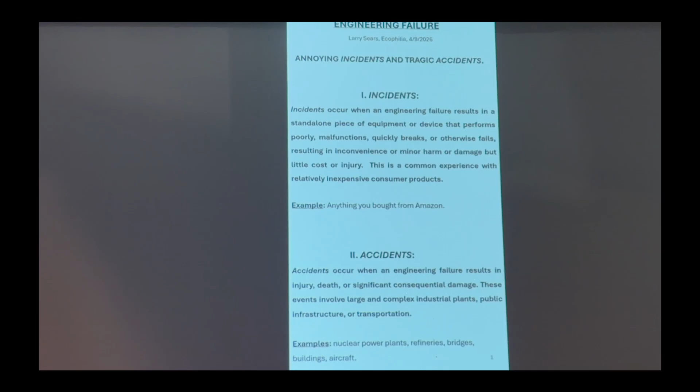Thank you for that introduction, Harvey—it was probably in error itself. So, is this working? Testing... this is the one you're using. Oh, okay, for the PA. Oh, I thought this was the one. No, that's—yeah, going, all that's right. See, communication errors, that's how things go. But I have to get closer to this, so let's move it a little bit that way. Larry, this is a wireless mic, you can just grab it. Different keyboards—I've never done a PowerPoint this way, so we'll see how it goes. I hope you've all read that, that's the introduction so I don't have to repeat it. Can't hear it? No? This one? This is—yeah, how's that? Okay, all right. It's insensitive, yeah, it's not—okay.

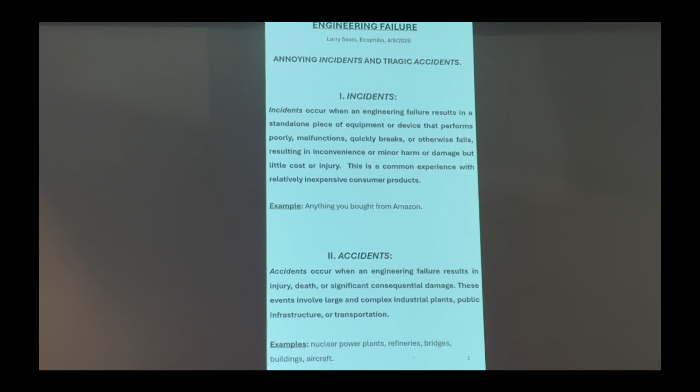People have studied and thought about failure in engineering, not forever, but it started probably in World War II when everybody was in a hurry to bring technology to war. Sounds pretty current. They had to then feed back and figure out what went wrong. After that, people in the 50s looked at operations research, analyzing and cataloging failures. Then sociologists and others, philosophers, anybody involved with neurology and what's going on in people, and whistleblowers and all that started thinking about it.

So it's a very, very interesting topic. If you've become addicted to the YouTube videos on tragedies and airline crashes and stuff, you'll understand why—it's a very, very complicated topic. I won't even talk about medical errors, because that's a whole other area that brings to mind all kinds of concerns and tragic incidents that we've probably all heard about.

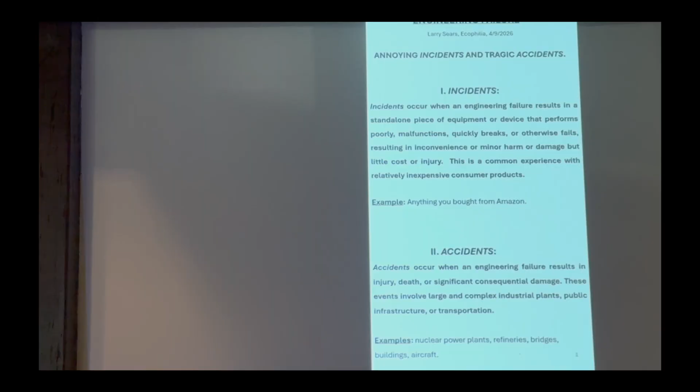I'm going to be talking about incidents and accidents. That's how a couple commentators have referred to engineering. Incidents are things that don't really bother anybody - you buy something and it's a piece of junk, or it breaks. It's common and annoying, but not terrible. We call those incidents because they don't have consequential problems or people don't get hurt typically. Accidents are more serious - things like airplanes crashing or bridges falling down, and other frightening things you can think about. I'll spend more time talking about those, and I hope some of these examples and topics will bring up questions as we go along.

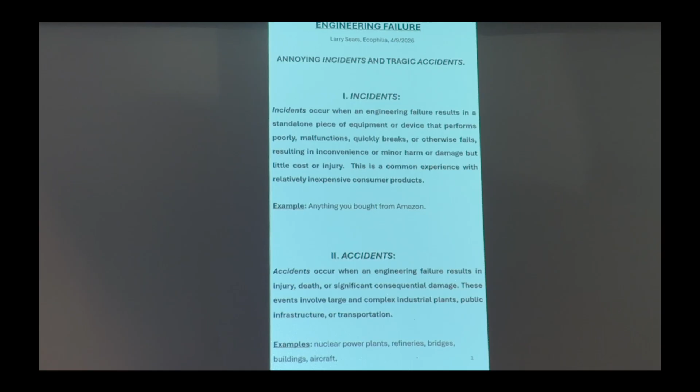So, incidents. We always come back to the root causes - how did these things happen? And of course, that is the challenge.

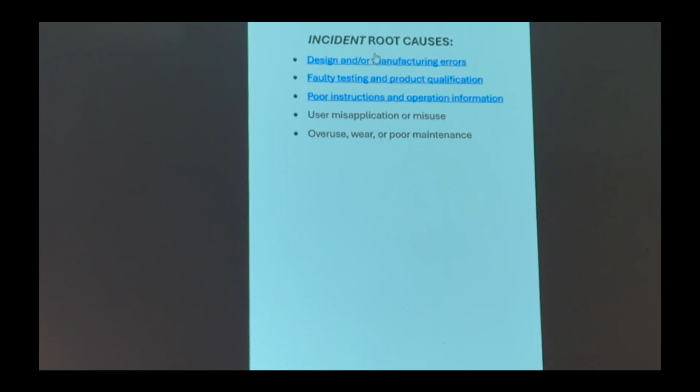I'm gonna have to lean down on this. Let's see if this works. Oh, it worked. Okay, so, incidental failures. I'm gonna hold this. There we go. All right, I should know wireless.

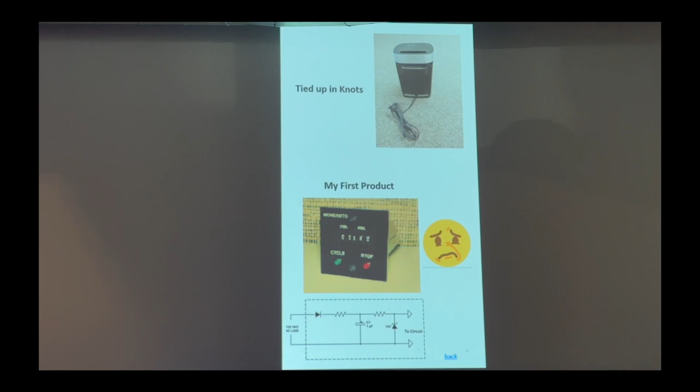This was one of my favorites - I didn't make this thing. It was a radio or some gadget that came with a line cord all hanked up, with a plug at the end. They built the device, attached the line cord, and then shipped it, not realizing you could never untangle the line cord, because you had to pass the device through the hank. So the line cord was permanently there, and nobody could use the product. That was a catastrophe, but it just goes to show you these problems can sneak up on you.

When we made things, we would always take it to the end - you'd actually put it in the box, ship it back and forth to your neighbor 10 times, and make sure it survived. If they had done that with this device, they would have realized they had shipped something that was dead on arrival.

The first thing I made when I was in a storefront on Murray Hill, trying to get into the electronics business, was a little gadget for Monsanto. I don't think it's around anymore, and I don't remember what it was for, but it was some kind of electronic control - a timer. I probably made 100 of them, which was very exciting, and it looked nice. And then they all started going bad immediately.

Interestingly enough, the ones in Alaska worked, but the ones in Florida never did - they failed immediately. So does anybody figure out what the problem was? Well, humidity, salt water, salt spray - something like that - but that's only near the coast. No, it was lightning. If you want to test something for lightning, send it to Florida.

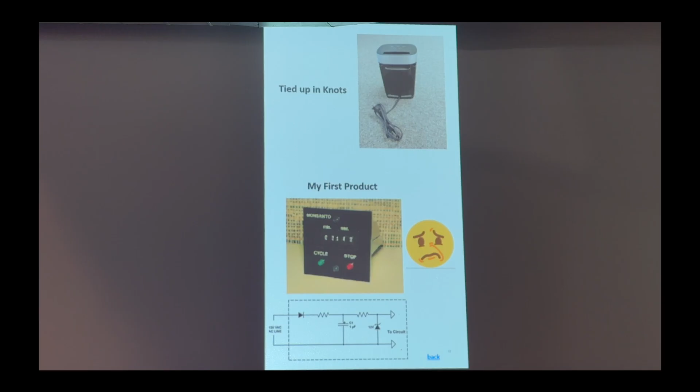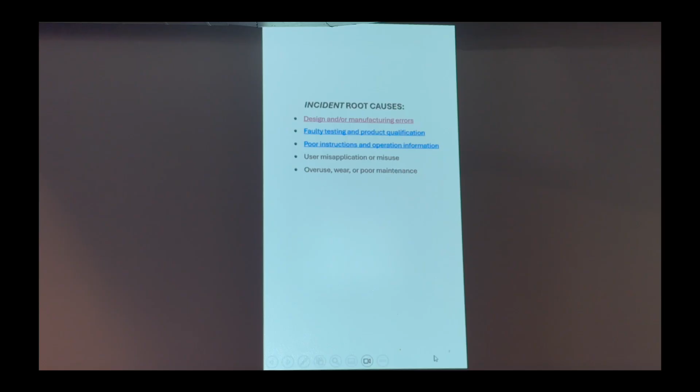But I moved on from there, fortunately. Whoops, sorry, I gotta do my trick here. I learned this is a very good aspect of PowerPoint, to link things. All right, so that was design and manufacturing.

Then we come to what else can go wrong - product testing. I was called into this more like a consultant. Eaton Corporation at the time was making HVAC equipment, and one of the things they made was a humidifier for a house - a box that sprays water into your heating vent down in the basement, and it humidifies the air.

And they were manufacturing this thing, and I got called into this factory, and these things were on the assembly line ready to go, and they had shipped some, and they didn't work, and they didn't know why. It was driving them crazy. So I looked into it, and it turns out they had done something very professional and very common. They had copied a circuit out of that manual you see down there at the bottom, and they thought it would work because it was a General Electric manual and they know what they're doing.

The problem is that it worked in the lab, but the humidistat, which was like a thermostat for humidity mounted on the wall of your house, was 50 or 100 feet away from that box in the basement, and the resistance of the wire was enough to make it malfunction. So they said, well, we're going to sue General Electric. And I said, good luck with that. These manuals are made for hobbyists and things like that. But that was interesting. They probably learned a lot more than I did, but things happen, and even the largest companies can make mistakes.

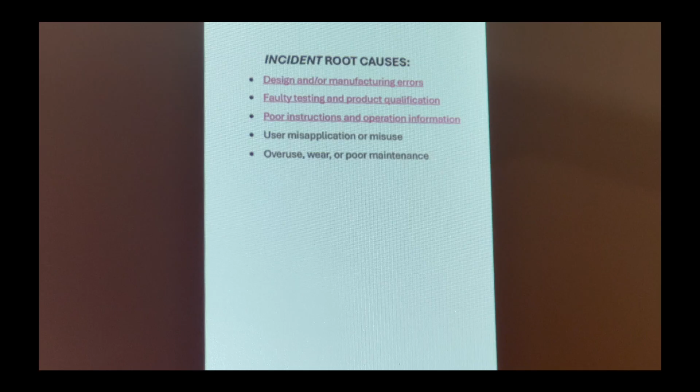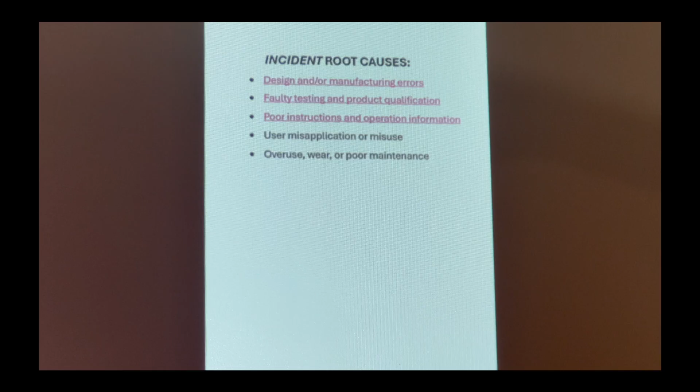So this is an example of an incident, and it's frustrating and aggravating. And I wonder, didn't anybody try it before they made it? So anyway, all right. Now we get into accidents. This is the serious, tragic stuff.

So we go back and look at the things that can go wrong, and let's go to design, the fundamental genesis. Pardon? The mic is also directional. Okay. Whoop. Like that? Ah, very good. Okay, thank you.

So we're talking about the system or project design, something big, like a bridge. It involves all kinds of engineering. It's very, very complicated, and certainly things can go wrong, and they can be little things or big things. So, a couple of satellites here.

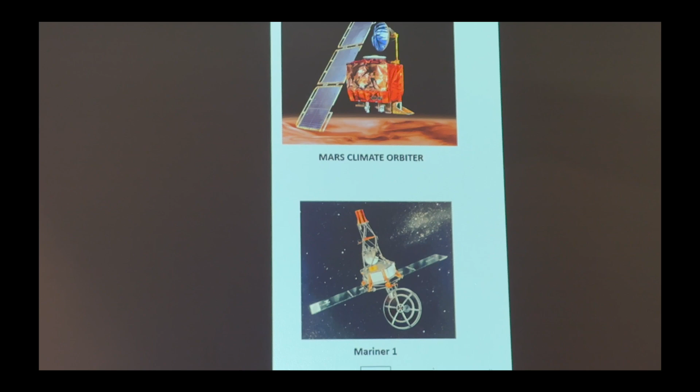Got to get this straight. The Mars Climate Orbiter was famous. That happened fairly recently, where there were two contractors, one working in metric and one working in English. You can imagine what happened. The numbers got messed up in transcribing them and moving the drawings over, and a $500 million satellite crashed because some intern didn't realize what was going on.

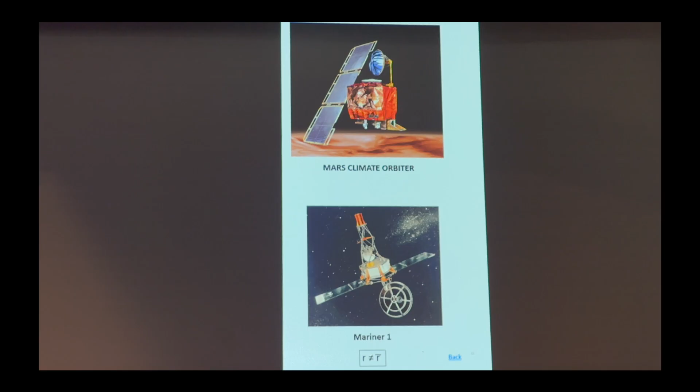The Mariner 1 was a long time ago, and this thing was landing, and it had a parachute to help, but of course in the Martian atmosphere it didn't help much, so they had retro rockets supporting it as it landed, and it had legs that had to open up, because of course they have to close everything up to fit in the nose cone. So it comes down, the legs open up, and the satellite decided it was already on the surface. So it turned off the rockets, and the thing crashed.

What happened was they had some kind of sensor, and I never figured out what kind it was, but maybe it was just a switch on one of the legs, or maybe some kind of velocity sensor. But the opening of the legs was enough of a shock that it fooled the sensor into thinking it was on the ground, and that was the end of it, because it turned off the rockets and the thing crashed.

So that's where testing comes in. Maybe you can't calculate something like that because you don't know exactly what the atmosphere is, and there could be variation in the speed coming down. But my goodness, you should be able to test it and look for that type of event. So that was pretty classic. And of course, when you think about it...

On television, probably years ago, you see news story after news story of rockets blowing up. It took them a while to get it right. Now, this latest one, I forget what it's called, the one with the astronauts, they just tested it a couple of times. I wouldn't get in that thing, so.

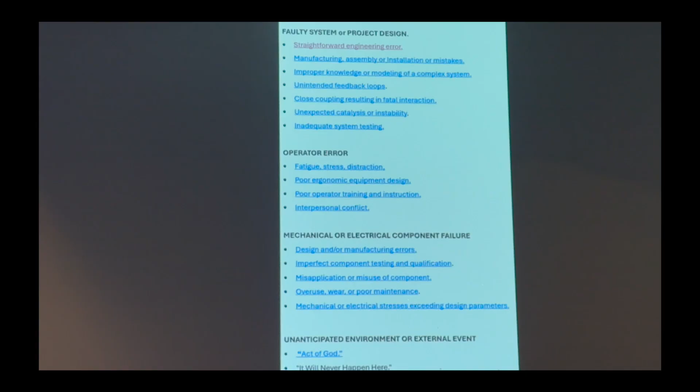But it seems like they always have leaks. I mean, your house doesn't leak all the time, yet these incredible rockets are always leaking. I just never understood that.

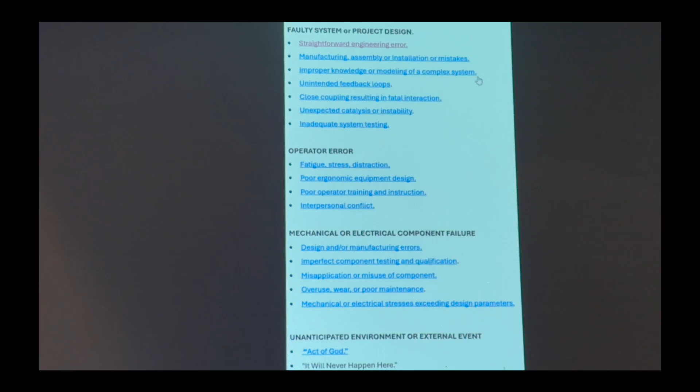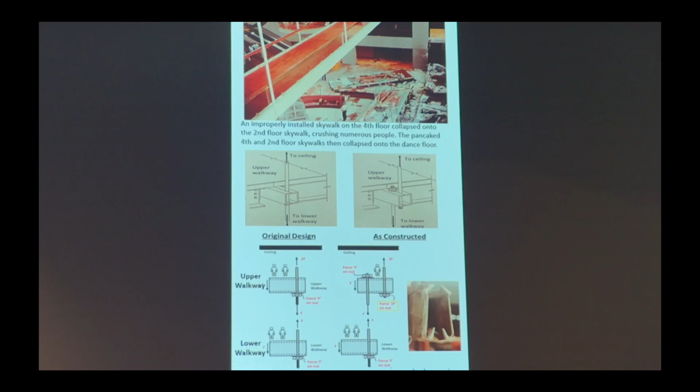Originally, this was an example of sort of consecutive errors. Originally, they had one steel bar, here's one steel bar, supporting both walkways. And the bar went through the upper box beam, and the box beam is going the width of the walkway. And then there was a nut and a washer here, which supported this box beam, but the metal rod continued to support the second box beam and the second walkway.

Well, if you stare at this, you can realize there's no way to put this nut on this rod because it's not threaded. You can't slide the nut all the way up and then put the other box beam on it. You couldn't assemble it.

And they realized that, so they came up with this very clever idea. The one rod would come down, and it would have a washer and a nut here. And the second rod would come down, and it would have its own nut and washer here.

And that solved the problem, except that in this configuration, the force on this nut is the weight of one walkway, and the force on this nut, trying to pull it off, is the weight of the second walkway. In this configuration, the force on this nut is one walkway, but the force on this nut is two walkways.

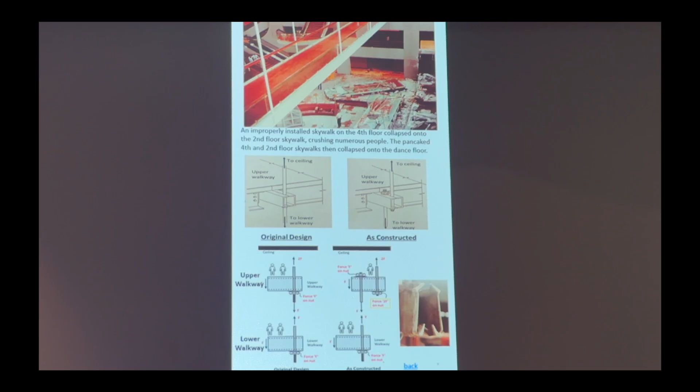Now, first of all, you say to yourself, a safety factor of 2 is not very tough. I mean, a safety factor of 3 would probably be used for a lot of situations like this, but obviously they didn't, and a force of 2 times was too much.

But when you think about it, that's really risky because you could have twice as many people on the walkway as you thought, or they could have had a big dinner and weighed a lot more. So I don't know, a safety factor of 2 is scary.

And there was another problem related to the size of the washer. All right, so if you look how the beam fell apart, you see how the bolt and nut pulled through. Somewhere I heard that the washer was too small too.

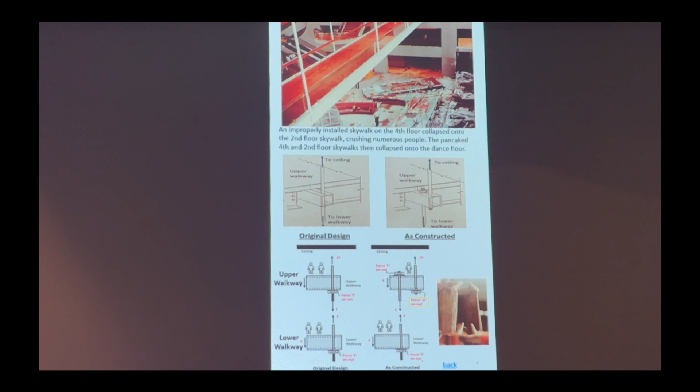Again, you've got all these problems, and it's easy to look at them and figure out what went wrong now, but not when you're under financial constraints and somebody's yelling at you and all that. Let me go back here.

Improper knowledge or modeling. Modeling is really important because you can't always guess what your environment's going to be. A good example is a concrete dam. You realize, of course, that a concrete dam is an arch lying on its side. And if you press on the top of an arch, the legs of the arch try to expand, but something is preventing that from happening.

A good example is a cathedral, where you have flying buttresses on either side, and the purpose of the flying buttresses is to prevent the legs of the arch from opening out.

The same thing is happening here, except the arch is lying flat. If you look at the top picture, those walls are preventing the arch from flattening, and the load, the water, is on the other side. So it'll work. Concrete loves to be in compression as long as the walls are there. The walls maybe aren't going to be there because you have earthquakes, but they have geologists crawling around drilling holes and stuff like that. Many times they just don't know what the bedrock underneath the wall is like. So the ability to model something to predict what's going on can be a real challenge. And of course you have to model, in this case, the walls, but if you're building a refinery, you have to model your refinery too and what's going to happen there. So that's a big part.

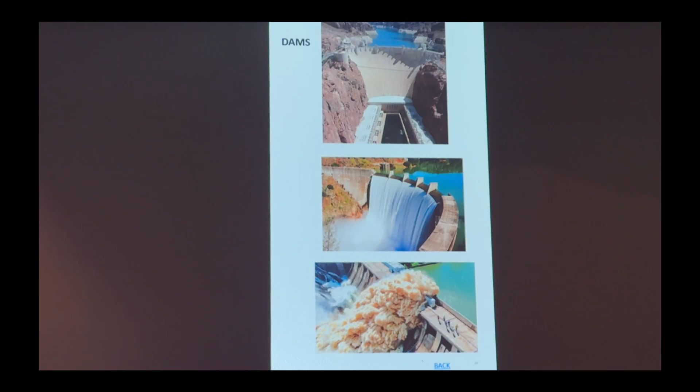And then, this is the incident - we got to go back to the accident. Unintended feedback loops.

I'll mention another one of my experiences. This is the Bingham building, which is on the campus here. There was this thing years ago, before you had big computers and finite element analysis - if you wanted to understand stresses, pulling on something, is it going to break, that is a very clever, although rather intricate or involved method of modeling these things.

You would take a piece of flat plastic, a quarter inch thick acrylic, and it had this interesting characteristic that if you stressed it and looked at it through the right arrangement of polarized light, you'd see beautiful little fringes. And the spacing of the fringes indicates the stress.

So if the fringes are close together, like over here we have a beam supported on two sides with pressure in the middle, you can see the pressure is highest in the middle. That's pretty easy to figure out, but if it's a complicated shape with holes or something, this is a very handy analysis. For example, here's two teeth of a gear rubbing, and you can see the stresses are very high at the point of contact. And this is a cantilever.

The way this worked is you had a light source and your acrylic model, and then a camera or some gadget looking at the polarized light coming out. The one requirement, though, is that in order to match index of refraction, you had to put this acrylic model in basically a fish tank, an aquarium of a special liquid that matched the index of refraction.

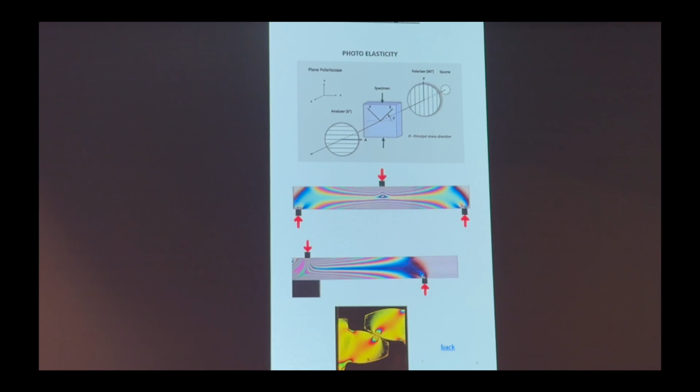It exploded. It was an exothermic reaction between this mystery oil and the copper angle irons that were part of the aquarium. Now, who would figure that out - it sat there for a month, and then maybe it was August, the temperature got a little higher, kicked off the exothermic reaction, and it went so fast it just destroyed everything in that room. I opened the door, everything was smoking and covered with black soot, which is the oil, and I just went home. He got his degree, but I imagine they just threw everything out in that room. It was disgusting.

So that was the idea behind a feedback loop that you don't realize is there - typically something that regenerates and causes more problems.

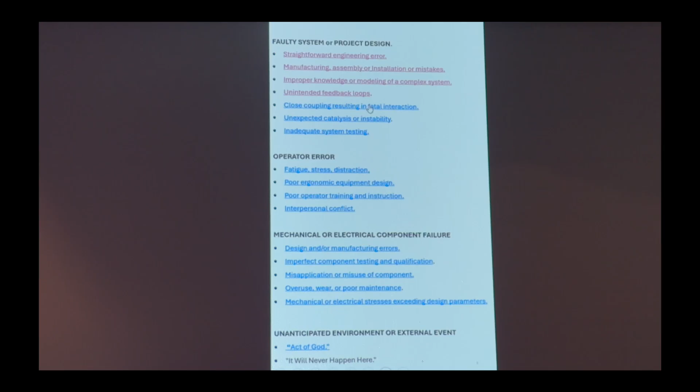Close coupling - these books that I mentioned are big on close coupling. The idea is that if you have a process where things are closely related, they can be too closely related. A very simple example would be say you have a fire alarm - a fire starts and the fire or explosion turns off the power supply to the alarm, so there is no alarm. That's an example of something that is closely coupled without redundancy.

Or maybe you have a temperature sensor or something, and the thing that is powering the temperature sensor breaks, and then you can no longer measure the temperature because, again, those two things are related.

So you want to have redundancy and all kinds of things. The godfather of close coupling and lack of redundancy is Three Mile Island.

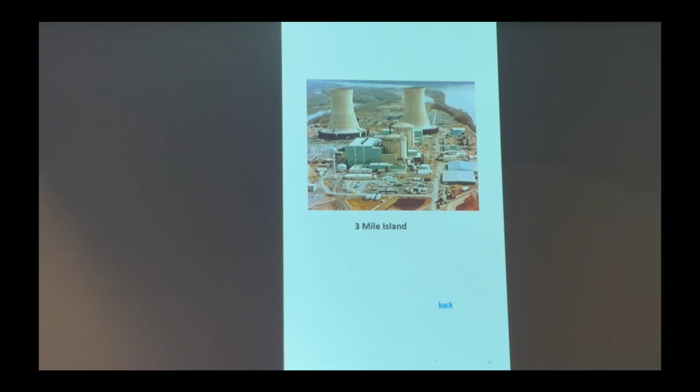Three Mile Island was obviously an incredible experience, let's put it that way, and it really changed the way power plants were operated. The way it worked, these are all sequential events with no break. We call that now a circuit breaker, something that breaks the idea of these events happening one after another.

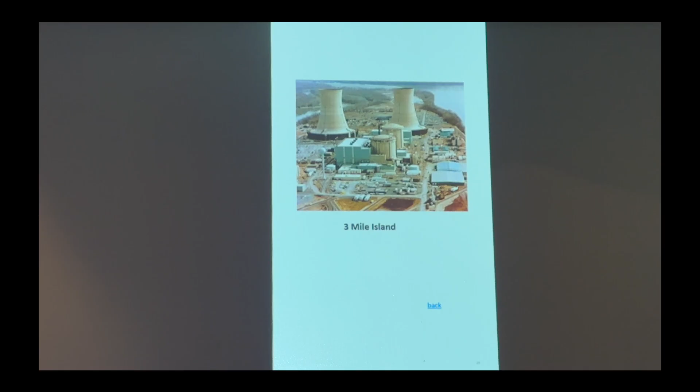But what happened was there was a failure in the non-nuclear part, just basically the steam turbine that uses what amounted to water that had been—you have dirty water in the reactor. Then there's a heat exchanger, which transfers the heat to clean water, and the clean water goes out into the world and runs the turbine and stuff.

But the turbine broke down, something happened, or there was a leak, so they had to turn that off. Well, when that happens, you have this reactor sitting there churning, putting out a tremendous amount of energy, but no place for it to go, so automatically it shut down, and it should, because it has no place for the energy to go.

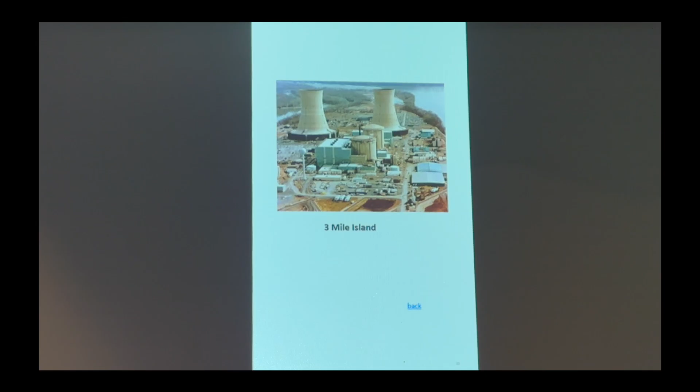So if you do that, though, you have residually a stored heat in the reactor, and things start heating up and boiling again. So what do you do? Well, you have to vent it. You have to vent the pressure in this reactor.

And so the release valve opened, that's good, but it's stuck open and it can never be closed again. So all the steam and water that was cooling the reactor started going out this pipe. And obviously then the big problem is you're no longer cooling the reactor.

Then everything escalated here because they couldn't measure the temperature in the reactor. Why? Well, they measured the water temperature, but there wasn't any more water.

That actually happened to me on a car once. I was driving along, and strange things were happening, and what happened was the temperature gauge said everything was fine, but there wasn't any water in the car. So I don't know how they do it now, but that was a problem. And that was in Kentucky someplace.

But anyway, in this particular case, several things happened. One was that the range of the temperature device wasn't enough, it got so hot the needles in the readout devices were pinned. They couldn't go any higher. They didn't know what was going on.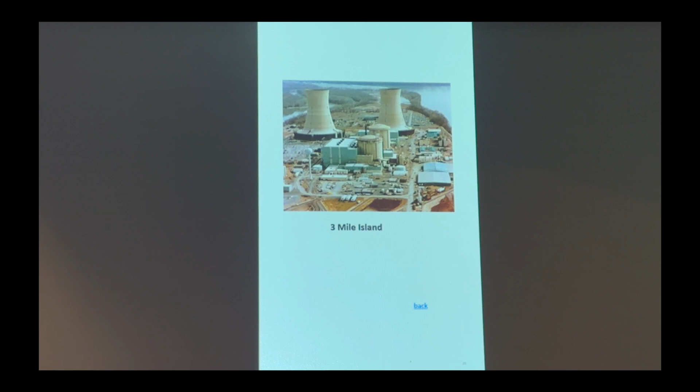And then in one case, somebody had a handwritten label for some other purpose. Basically, it was a tag that said this will be fixed on Thursday or something. And that tag was covering the one thing they had to look at. So it was just—and I'll talk about this later on—but it was absolutely terrible.

But they did have these pumps, of course, but then the pumps broke. The pumps had bubbles in the coolant pumps, and they had to be shut down. And then they just had to let this thing vent, and then of course there was no water to cool the core because they had vented it all out, and that's why the core was exposed and melted down.

So that's what happened to Three Mile Island, and you can read—there are obviously books written about it—and it's just horrible. They learned a lot from that.

Unexpected catalysis or instability. Okay—oops, sorry, we'll get back to that. So in other words, a lot of things are tricky.

Well, even like that exothermic reaction I mentioned, that happens a lot in refineries and power plants that are always in Texas or Louisiana and are always blowing up. Things just get out of control. I mean, so many things are linked.

I'll talk about some of those, but Three Mile Island had something that may or may not have happened, and nobody ever expected it, and now they're not even sure if it happened. And that's the infamous hydrogen bubble. Over here they talk about it, the famous hydrogen bubble.

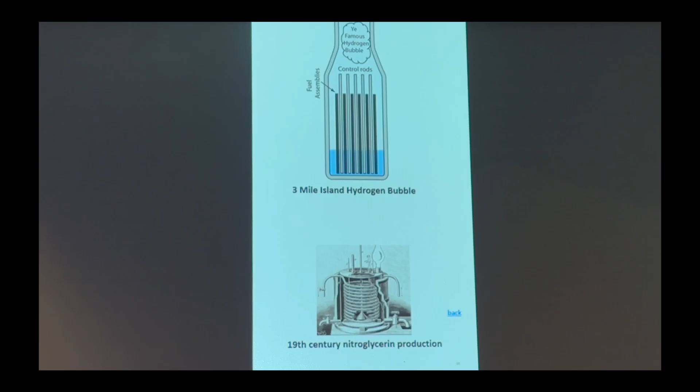Testing, all right. So this is the Mars Polar Lander, let's see what happened to this one. Oh no, sorry, that was the one that failed prematurely. I got them mixed up. This was the one where the sensors in the legs inadvertently thought the device had landed and turned off the motors.

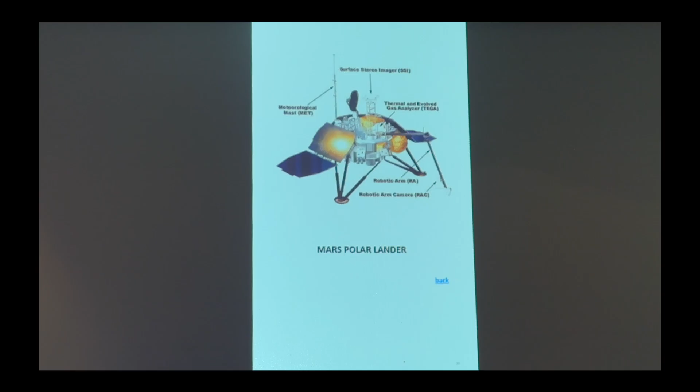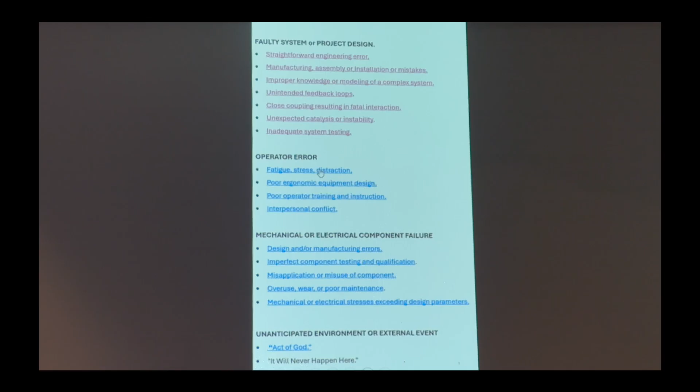Operator error. If you look at a particular environment, like airplanes or chemical plants, supposedly about 50% of the really bad problems are operator error. I don't know, it depends so much on the environment, and it depends who's telling the story too. But anyway, it certainly is a big problem.

This is a wonderful YouTube if you can find it—terrible, but wonderful. This was back in the 70s, and these two pilots—there were two back then, I think two pilots and a navigator, maybe a third or fourth, I don't remember—they're flying along and put the landing gear down. There are three levers: one for the left gear, one for the right gear, and one for the nose landing gear.

Each one has a pilot light. The pilot lights on the left and right indicated the landing gear was down, but the pilot light on the nose didn't. Of course that's a big problem. They tried to have traffic control look at it visually by flying by, but he couldn't tell if it was locked. So they didn't know what was going on—was the light bulb bad, the switch bad, or was the landing gear really bad?

They sent a guy down into what's called the hellhole, under the deck beneath the cockpit—I have a picture of it. It's like 20 below zero, and he's crawling around trying to peek at the landing gear. He couldn't tell, and came back up. Then they tried to disassemble the control panel because it might have been a bad light bulb, and the plane crashed. What happened was they bumped the autopilot and turned it off inadvertently. The autopilot would have kept them above terrain, but it didn't, and the plane crashed. It was a terrible story—these people were actually arguing about this stupid light bulb and forgot all about the plane. That's a great example of distraction.

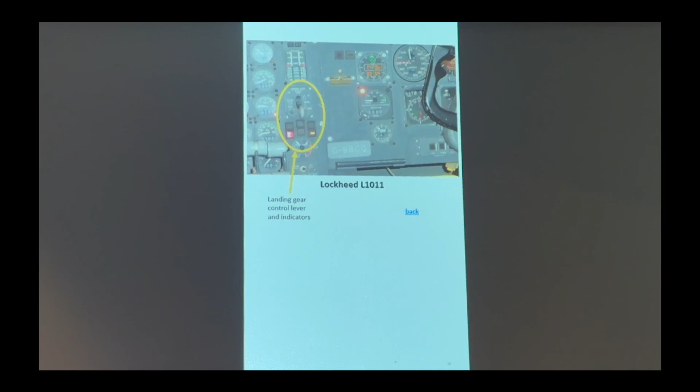That brings up the question about these indicators. Another problem, going back to Three Mile Island, was that you threw the switch to open that mysterious valve, and the light bulb was supposed to tell you the switch position—green if open, red if closed. The problem was the light bulb just told you the position of the switch, not the position of the valve. Think about that—that's how they all work. It's a terrible story, but it's human nature, I guess.

Ergonomic equipment design, back to Three Mile Island: this panel is 60 feet long and has 1,600 controls, most of which are designed or placed in relatively random locations. And when all this was going on, they had 70 people in the control room.

Can you imagine? There were tags that covered up controls. There was a famous story where they were doing maintenance work on a plant, and somebody wanted to check a conduit that had a bunch of cables in it, to see if there were leaks and if the conduit was sealed. So he used a candle, and he started the cables on fire. Millions of dollars worth of damage.

But they learned a lot in the whole science of ergonomics and psychology and how people react, through Three Mile Island. There was a lot to learn. The control panel was completely redesigned. If you think about it now, look at airplane cockpits, everything now is screens, not little levers and stuff. You can do a much better job of human factors engineering if you have the ability to put block diagrams on screens instead of physical switches.

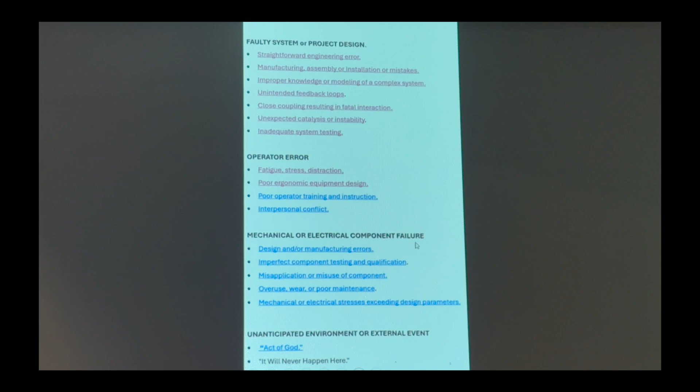Operator training and instruction, all right? There's actually a book on the history of torpedoes and all the problems. In 1939 the Germans were already at war. The U.S. was caught with their pants down, they had to start making armaments, so they started working on torpedoes. Long story short, they didn't work until the end of 1942. They had terrible problems. It was okay because the Germans' didn't work either.

In fact, Winston Churchill was surreptitiously taking a freighter across the Atlantic in 1939, and the Germans knew he was on that boat and fired a bunch of torpedoes. Theirs didn't work either. And that really changed the course of the war, as you can imagine.

Torpedoes were a problem. The Japanese had wonderful torpedoes called Long Lance, with twice the warhead size, and they were incredibly reliable. The U.S., about 90% of the torpedoes didn't work. They'd bounce off the ships, they would explode prematurely, and if a torpedo misfired it would give away the position of the submarine because of the wake or the premature explosion.

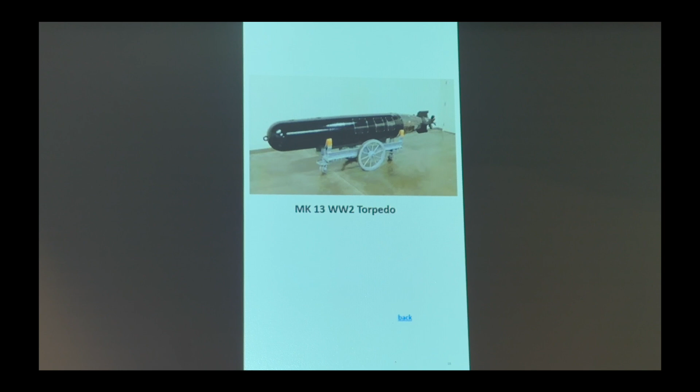The submarine sailors were just in revolt, going crazy. And now you come to the bureaucracy. The same bureaucracy was in Nazi Germany, the same idea. The Germans were very strict in their organizations and procedures, and they wouldn't listen to the sailors. But the U.S. wouldn't either. They couldn't persuade the sailors, who'd come back having fired 10 or 20 torpedoes and none of them went off. And of course the management blamed the sailors for that.

To give you an idea how crazy this was, with all these problems with the torpedoes, with technical problems, they also forgot to send operating manuals out, so nobody even knew how to operate them. These were complicated, you had to set the depth and all this kind of stuff, and it was just chaos. They were blowing up right outside the submarines. Terrible.

Very interesting, though. I'm sure you've all thought about torpedoes. Depending on the kind of ship you're after, you really want the torpedo to blow up under the ship. You don't want it to just hit the side, because it's very easy, and they did put these bulges on ships that would prevent the torpedo from penetrating. So how would you explode the torpedo when it got close?

Well, they had this great idea: they would reference the Earth's magnetic field. They'd have a magnetometer in the torpedo, and when it sensed that the Earth's magnetic field had been disturbed, it would set off the explosion. Of course, that's great because they tested it in the northern hemisphere, but when we went to the southern hemisphere it was backwards, and the signal was negative when it should have been positive, so it didn't go off. They had to map the magnetic field of the Earth, and it was just terrible.

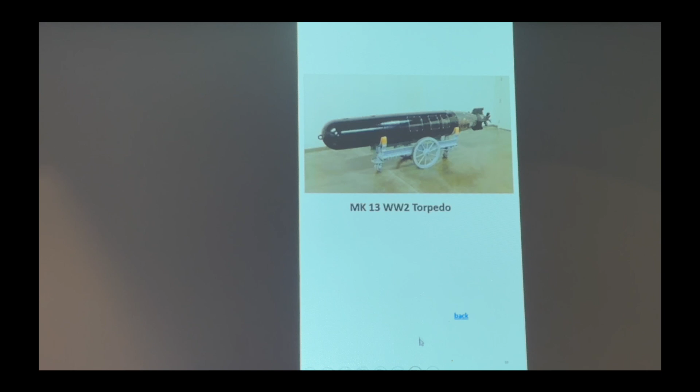There were all kinds of problems. A lot of them just leaked. They had to sit in the torpedo tube for maybe 15 minutes to get ready to launch, and by then they were all leaking salt water. It was really terrible—not funny terrible, but tragic. The number of duds was just unbelievable. This was a bigger problem in the Pacific because of the distances involved and everything.

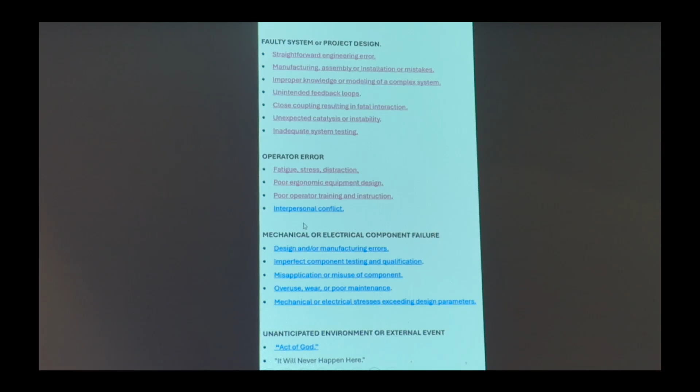Submarines were really important. Interpersonal conflict—okay, this is a great one. Malcolm Gladwell, is that his name? Yeah, you've probably read some of his stuff. He talked about this, having to do with cultural differences.

In Korea, the culture assumed there was a very strict division based on authority and position and hierarchy. So you had a captain and a co-captain, and the co-captain would say to the captain, 'Sir, the engine's on fire,' and the captain refused to listen to him. They were having terrible crashes because of this silence—they basically only had one person driving the plane. The co-pilot had certain responsibilities, but the captain didn't pay attention to him because he was a lower status position. When they figured this out, reliability got much, much better.

That just shows you how psychologists go to work for airplane companies, and sociologists for that matter.

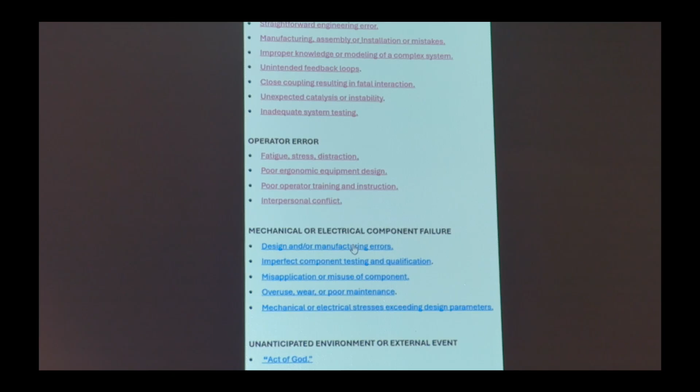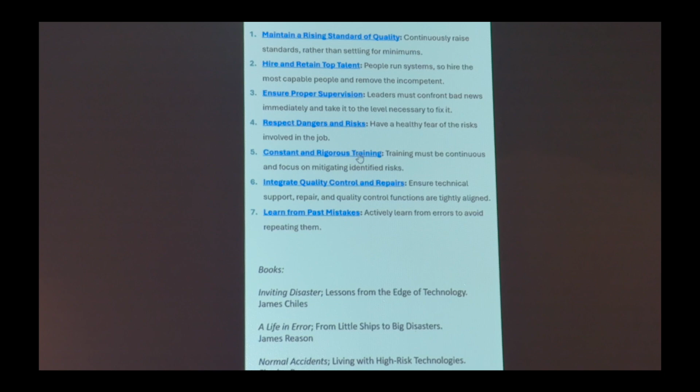So these systems are built of components. We've been talking about system problems, how one component relates to another, but much like the incidents, the little gadget, the little tool you buy to take home—these individual components can fail and start a sequence. So some examples of that... very sensitive mouse here. Okay, design and/or manufacturing errors.

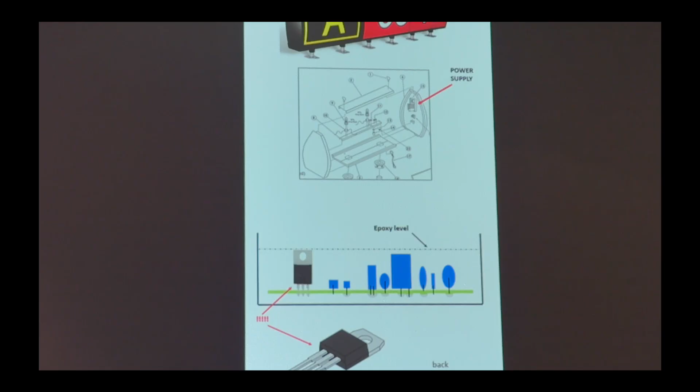This is one of mine, I'll take credit for this. If you go to most airports, you see a sign curved like this. It's made by a company here in Cleveland called LumaCurve, and they make them all, and have for many years. They needed some electronics because of these weird wiring situations in airports—it has to do with the fact they have to be dimmed, and there's many, many miles of wiring and all that.

So these lights, off on one side, had a power supply which I designed for them. The environment is terrible—these signs are not really sealed. They're actually sort of expendable because they keep getting hit by exhaust from jets and getting blown over and stuff, so they're built to be repaired. But since they're not sealed up, the power supply had to be sealed up for moisture and such.

So I just took a box, like this big, with a printed circuit board—this is a side view down there—and the board had electronic components soldered to it, like you typically see. One was a power transistor, shown in a larger view down at the bottom, perched on the circuit board and soldered underneath it. This circuit board only had copper foil on one side—that's the way it was done then. Then it was filled up with epoxy.

They worked fine for a while, and then they started failing, so obviously we had to get to the bottom of that. What was happening turned out to be temperature cycling. The thing was filled with epoxy, so there was epoxy between the body of this part and the circuit board, which was down here.

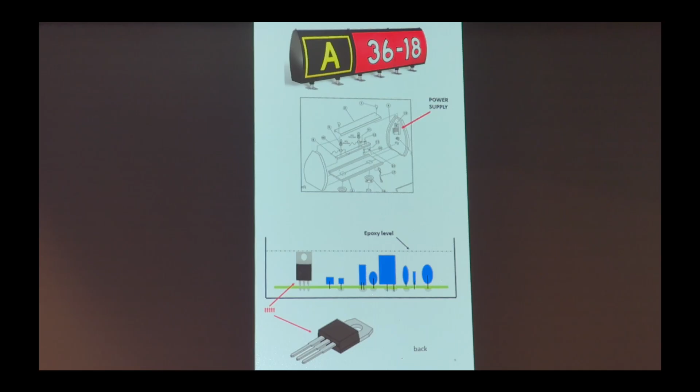But that was another one of mine. There were many - imperfect component testing and qualification. Apollo 13, that was relatively recently. Everybody knows that story. What was curious about this is that they tested it, but the testing destroyed the product.

They tested it, and for reasons, probably economic reasons, to speed things up - this was an oxygen tank with a heater in it. Because in order to get the oxygen, it was probably liquid oxygen, and they would heat it to get the oxygen to flow, so they didn't need a pump or anything. So in testing, for whatever reason, maybe just to speed it up, they tested this thing at 60 volts, whereas in operation, it only ran on 24 volts, so the heater was only designed to operate on 24 volts. So anyways, they tested it, and in the process destroyed it, but never knew it because the test was over.

So it was not working. The thermostat was faulty, and it was basically welded shut. And then they went ahead and installed it without testing it again. So somewhere along the line, somebody made a pretty grievous error. That was the story. There was not really any consecutive linkage there - it just blew up, and from then on, they were scrambling to make it back.

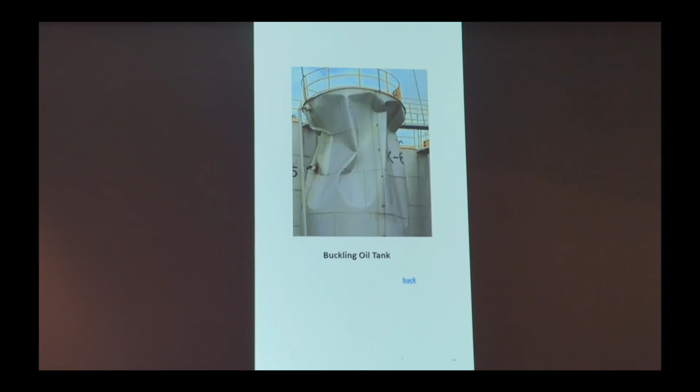So that could be training, it could be procedure, don't know. Obviously overuse is a problem - things wear out - but maintenance is really a problem, and that's what happened in Bhopal, which you probably remember. I think 5,000 people died, and they're still dying. It's a terrible, terrible tragedy which Union Carbide never has really taken responsibility for. And so, in this case here, this has been pretty well understood and documented, but I have to read it to get it right.

There was a tank filled with this very, very nasty methyl isocyanate. So it sounds bad, and it is. Unfortunately, it doesn't like to be mixed with water, but there was a faulty valve - so that's maintenance issue number one. There was a faulty valve which allowed water to get into this tank. There was water in an adjacent process, and somehow it got piped into this tank.

So an exothermic reaction resulted. They knew about that at least, but they never figured that water would make its way into this huge tank. So the pressure built up, and then there was a vent. They always have a pressure cooker setup, and your hot water tank has an overpressure relief valve, and they had one too, but they had turned it off three weeks ago - maybe it had been leaking. So that's another problem.

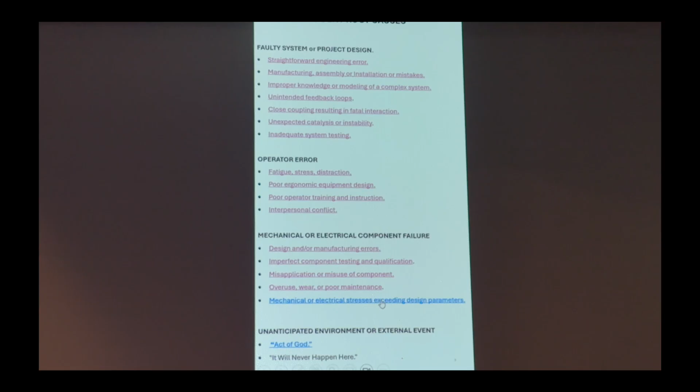All right. Mechanical or electrical stresses exceeding design parameters. Whenever you have a design, you sit down and figure out not only what it has to do, but what it has to resist, or work over. What is the maximum temperature? If something has to work in the engine of a car, it's got to work up to like 250 degrees F. If it has to work inside the car, it has to work up to like 185 degrees F. There are all these requirements specified by, like, the Society of Automotive Engineers with temperature requirements. And airplanes have an incredible series of limitations and parameters—how fast you should try to have the airplane rise without stressing the wings, or your speed of landing. Obviously, how high you should go, because if you run out of lift since the air gets so thin, bad things are going to happen.

So there was a Pinnacle Airlines—they're gone, obviously, this slide. They had a ferry move an airplane from one airport to another. The pilots were flying an empty plane, and they decided to try some horseplay. They had this informal little group, probably thought up over too many drinks, where the pilots in this airline all tried to join the 410 Club, where you flew your plane at 41,000 feet, which was the limit of this particular type of airplane.

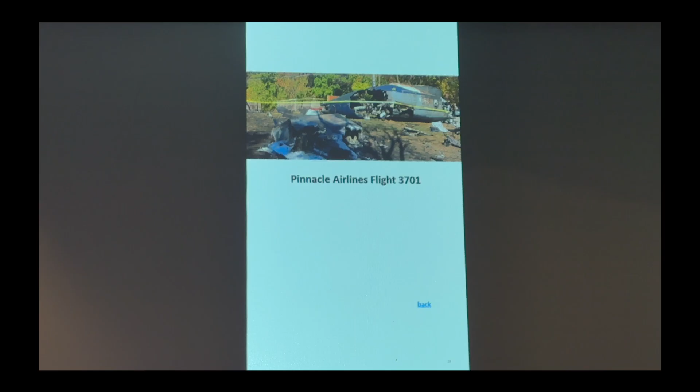No people were on there, of course, and they probably wouldn't have pulled this stunt if there had been people, but they paid the price. So that was another well-known story.

Unanticipated events—okay, these might be called acts of God or something, or 'it'll never happen here.' Let's see here... oh, no, that wasn't it. I left out one link, so I've got to find it here. Resort to paper when all else fails.

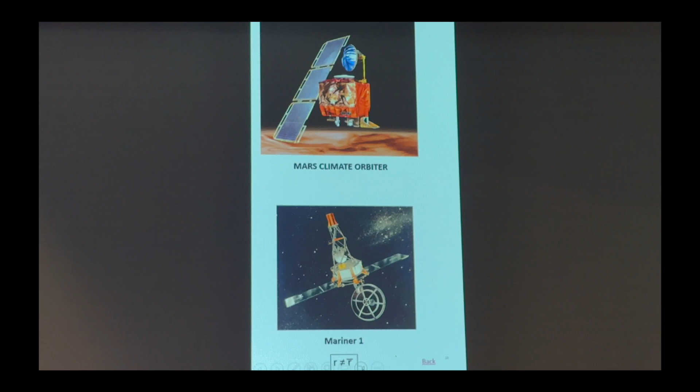Oh yeah, the Ocean Ranger. If you remember that, that was quite a tragedy that went on for a few days, and quite a few people died. What happened was these large oil rigs—there's all different kinds. Some of them sit on the ground, but some actually float, with these long legs which they fill with more or less water to stabilize them. They have all kinds of sensors and pumps and fancy control systems to keep the thing level and in location. This was one of the most advanced ones. I have no idea what it cost, but I'm sure it was upwards of hundreds of millions of dollars. Everything was fine, then a big storm came, and the computer room was located up on the deck someplace where it should never have been subjected to waves.

That was in the specification. And it had a window. Well, a big wave came, smashed through the window, and of course all the controls were gone, so they couldn't stabilize the thing, and basically it sank, and lots of people died. So that was an example where, to them, it was unexpected—it should never have happened, but it did happen. So you have to be very, very careful in defining these things and saying that's never going to happen.

And of course the reliable products, the reliable systems are the ones where they've stretched the parameters to include every conceivable thing. But then again, you have the act of God. Are you designed to survive being hit by a meteor or something? Well, it happened here recently.

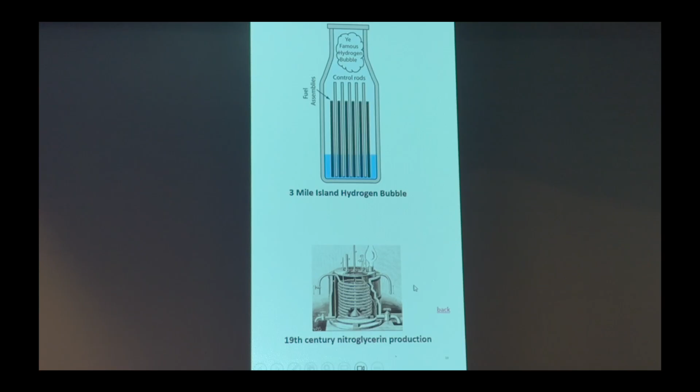So, back to the beginning here. So, what do you do? Well, this is obviously the shortest part of this talk because it's pretty obvious, okay?

This concept of separation of components. You don't have the same power supply operate the light that's controlling the valve, so you try to split these things up, and you try to simplify it. As I always would tell my students, the most reliable component is the one you don't use.

So throwing in extra stuff, it's a very, very fine line. Yes, you want to have redundancy, but having those tend to be parallel things that take over if something goes wrong. So in an airplane, everything is run by hydraulics, but there are actually two separate hydraulic systems with check valves.

They found a number of accidents occurred where there was structural damage to a plane and the lines broke, and all the hydraulic fluid leaked out. They couldn't control the planes, the surfaces. So now they have two systems, but of course they used to have two systems and ran the pipes close together, which sort of defeated the purpose. Now they have two systems, but they keep the pipes separated, and the same thing with electrical cables.

So there are obviously a lot of things you can do to reduce complexity, and fix it, for example redundancy, backup systems. I was always fascinated by, in the process of designing those landing lights, they have backup power for landing lights. I'm not talking about the signs that just told the airplane what gate to go to, but the actual lights lining the runway. You don't want those to turn off when the plane is landing.

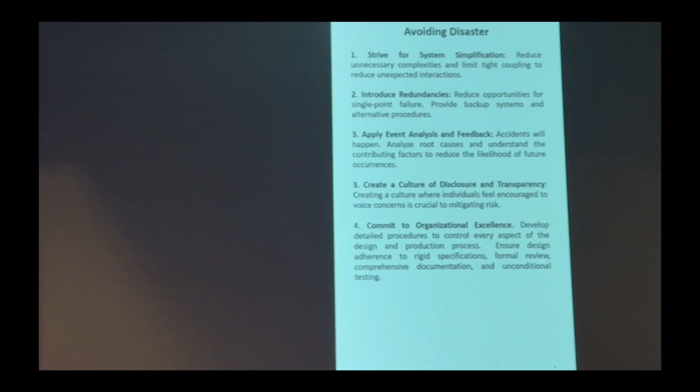If your keychain was too heavy, so if you hung like a skull and crossbones on your keychain, and you're driving along on a twisty road, the weight of the keychain would cause the ignition switch, back when they had keys, to switch from on to off. So your car would turn off. Sometimes the steering wheel would lock, the airbags would turn off, the engine would turn off, the power brakes didn't work, the power steering didn't work, and I think like 100 people died over the course of a couple of years. This whole investigation was incredibly complicated.

The switch had a detent. Now there are probably SAE requirements that say a certain amount of force it takes to turn the key switch from one position to another. They didn't have that then, so they had a couple of engineers in the back room setting the standard, and it just got all messed up. Somebody changed the spring for whatever reason and made the detent too weak, and so this problem started to happen. Then somebody else changed the spring back. Nobody recorded when any of these changes occurred.

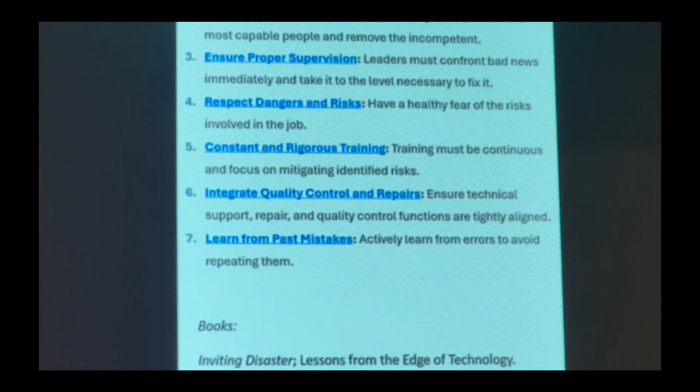Let's see, I have something else here. I'll call out another one of my problems. This was definitely an accident because I almost died. I'm not sure I've told this to my wife in a while. But back on Murray Hill,

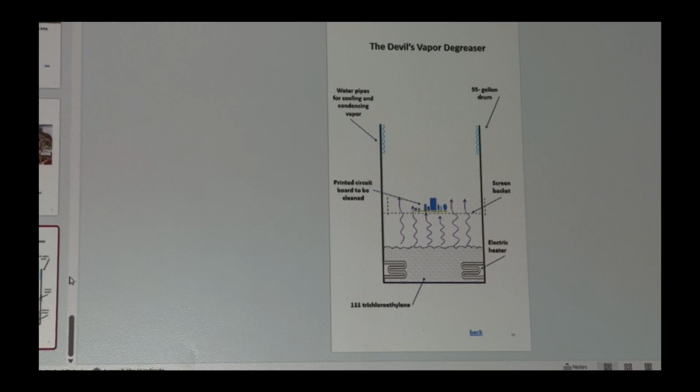we would solder circuit boards. And the problem, it's still a problem, but you would solder circuit boards with rosin, the same stuff that comes out of a tree. And you had to clean the circuit boards. There's all these schemes to clean them, but a quick and reliable way was to

use a vapor degreaser. So these are fancy machines, but then there was our machine, which was a 55-gallon drum, with a garden hose wrapped around the top and an electric heater down at the bottom. You would pour in trichloroethylene, which has now been banned, and you'd have 5 gallons of this nasty solvent at the bottom, and these electric heater coils would make it boil, which is pretty bad when you think about it.

And then there was a basket, and in the basket you'd put the stuff you wanted to clean, and the vapors would come up and dissolve the stuff you wanted to get rid of, which would drip back down into the machine. The vapors would keep rising, but hopefully the garden hose with cold water would cause the stuff to condense and fall back into the barrel.

The problem with this thing is there was no way to clean it. There was no drain, you couldn't empty it. So somebody, mainly me, had to get in there with a scoop and scoop out this hardened goop at the bottom. I was alone, because I was working all hours, and this thing was in the basement of the Murray Hill Market, which is where my company was.

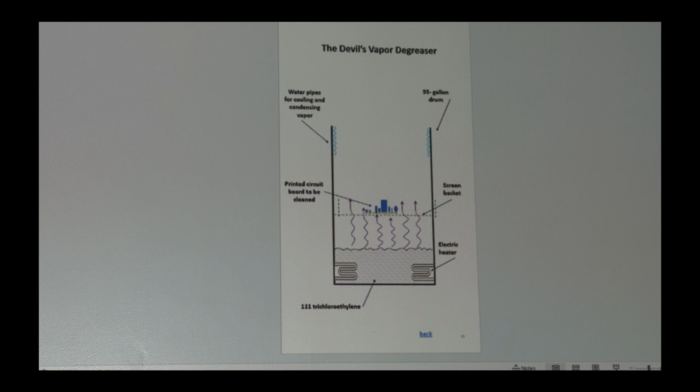I had a scoop, and I leaned over, forgetting there was no oxygen in that barrel. The machine was turned off, of course, it was cool, but it was all trichloroethylene vapor and no oxygen. So I fainted, but fortunately I fainted and fell outside the barrel rather than inside it. So that, you're laughing now.

But eventually I got rid of all the solvents in the company. No solvents were allowed. But anyway, that was the story.

If we have a minute, another one that is pretty contemporary, which I think is just frightening. If you've used a CPAP machine, you'll know there's been a terrible recall of CPAP machines, ones made by Philips. This shows you the value of, when you're 10 years old, taking apart toys or tinkering, or just being someplace where you see how things are put together and what works and what doesn't. If you've ever taken apart an old speaker cabinet, it has foam rubber in it.

And you probably know, especially this black stuff, it decays and it just crumbles and goes all over the place. Semiconductors used to be shipped in this stuff, and it was so nasty that you'd open up the container and your transistor would be laying there covered with this disgusting black powder. Anyway, that foam, maybe not exactly the same kind, was in these CPAP machines.

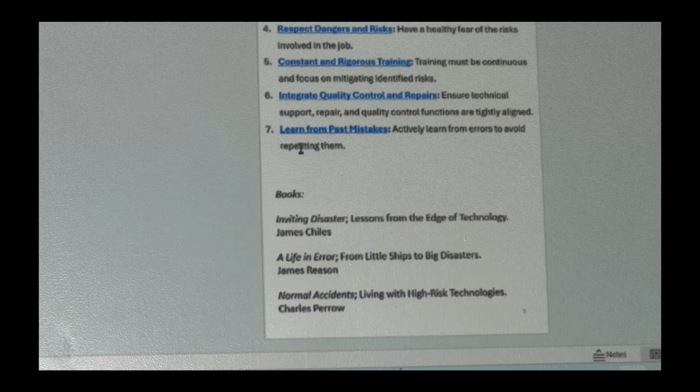Question? Yes, sir. I was going to ask you if you were familiar with the Ashtabula bridge. Oh yeah, in like 1880 or something.

It would be fascinating to take all of your checklist of all the things that could go wrong and break that whole thing down and say, this is where this failed and this is where this failed.

That is an interesting story. It goes back to one of the New York financiers, and somebody tried to murder him because he designed the thing, and it's quite a story. There was this huge wooden trestle that a railroad ran over, I guess the valley of the Ashtabula River, and it collapsed quite dramatically. I guess you can still see the abutment and some of the consequences. But the story, the aftermath, and all that was pretty interesting. It was a tragic thing, but just the whole story of the engineering and how the engineering got compromised and then compromised again, and the zoning guy got...

Oh, I didn't know all of that. I just knew the aftermath, the architect or the engineer, the financier. There was all kinds of drama.

It would be an interesting thing to take your boxes and just apply them to that whole story and say this is where this failed and this is where this failed again, the sequential nature of it. Now of course a lot of this stuff is fairly well documented. And back then, I'm not so sure.

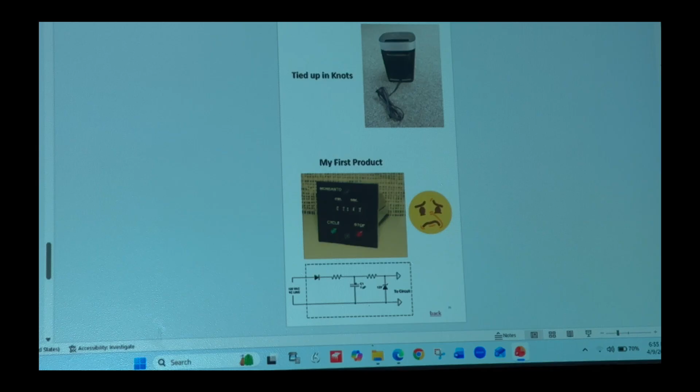But these lessons that you compiled here, it just seems like that should be part of engineering. Yeah, an engineer, we all know. I have talked about it once, there was some kind of seminar or something like that. By the way, I might take this and do it somewhere again. So this is a trial.

On a positive note, after Bhopal and the similar tragedy in Charleston, West Virginia, these chemical plants are in valleys because they're by rivers, and of course you had an inversion, and thousands of people died. But after that happened, the chemical industry started saying we're in trouble and we need to do something about that. I'm on a citizens advisory panel for Lubrizol, and four times a year they gather all these citizens and tell us about what they're doing to prevent some of these things.

And the last two points that you made on your final slide, what they should be doing. It's very interesting how they've incorporated that into their everyday operations. For example, they will reward workers if they can find mistakes, on a daily basis. That's back to that whole whistleblowing question - don't bury it. And so this is, it's not a negative thing, it's a positive. They want to find these mistakes.